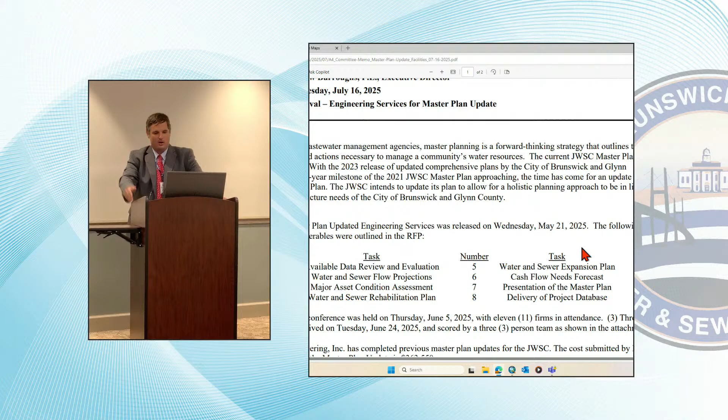Typically we update our master plan every 5 years. It's good for us to have a master plan so we can look forward. We typically do 20-year master plans. Our last master plan was started in 2020 and completed in 2021. Then Glynn County and the city of Brunswick both updated their comprehensive plans in 2023, which include updated population projections, land use maps, and everything like that. So it works out well - basically we update our plan, and in the intermediate, they update theirs, so we're always using the most recent numbers. Given that it's been 5 years since we started the new master plan, we put out an RFP to update the master plan in May.

There are 8 tasks associated with this. First, available data review - we collect a tremendous amount of data, both through CityWorks and our new AMI meters, SCADA, and everything like that, plus development that we've had and have records on. We'll submit all that information as requested by the engineer to complete the plan update.

They will update flow projections, taking the population projections produced by the city and county and updating flow projections based off the service areas. This time, with the new AMI meters, we'll have a lot more specific flow measurements.

We will also be getting a major asset condition assessment, so they'll go through all 3 of the wastewater facilities, check out our well facilities, and then a selection of lift stations where their engineering team will physically do inspections.

From those three elements - the data we have, the projected flows, and the condition assessments - they will generate the rehab plan for the next 20 years. Now, the rehab plan isn't something we follow in a direct order; it's a guideline. We prioritize based on risk scores through asset management, based on the condition and the consequence of failure. So we get a list of what needs to be done in the next 5 years, though not necessarily in a specific order.

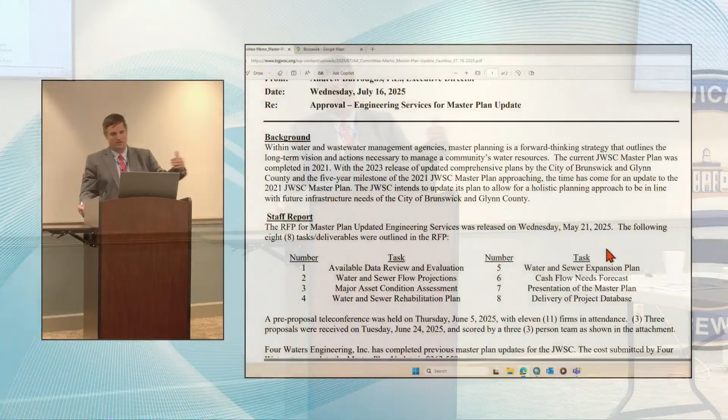We'll also take, based on those population projections and land use maps, a look at where we might need to expand our system to increase service areas. This can be with continued focus on infill development as we've been doing, or for areas where the county - not so much the city, since they don't have much undeveloped property - has designated potential residential areas that need to be serviced in the future.

Then, from the rehab and expansion plans, they will develop a cash flow needs forecast for us. We won't necessarily use this to project rates going forward, but it gives us an idea of where we need to be moving with our rates.

They will then come to the Facilities Committee and the full commission and present the master plan for your review and acceptance. Upon completion of that, they will generate a project database that will be delivered to staff. That is a tool we can use to go about updating the plan as we complete projects.

The unfortunate reality is updating the cost of those projects as they're currently in the plan to make sure they're updated moving forward so we have that cash flow where it needs to be based off of current pricing. The last master plan was begun right during COVID before everything went crazy with prices, so the prices you see in there are not reflective of the current environment. I would suspect this iteration of the master plan is going to indicate we need to spend more money than the last master plan just because the cost of construction has gone up so much since we updated it last time.

We did have 3 proposals submitted to us. All those proposals were scored by a 3-person team, shown in the attachment. The highest scoring team is Four Waters Engineering. Four Waters has completed the last 2 master plans that we have done, and members of their team worked for the firm that did the previous 2 master plans. So we've got members of their team that have been working on our master plans for over 20 years. The highest scoring, Four Waters, had an average score of 95 out of 100.

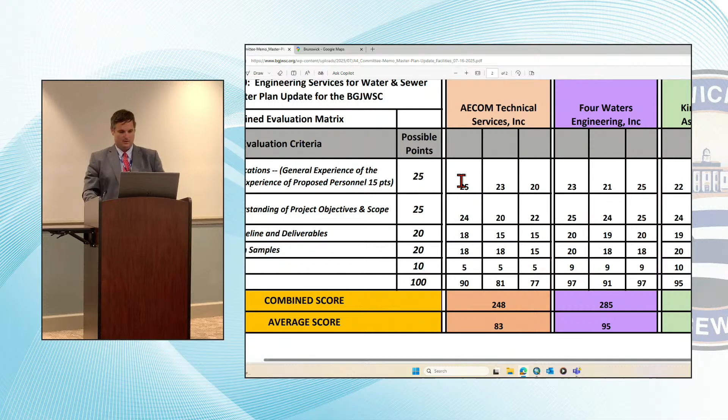And with that, I'll be happy to take any questions. This will be funded from uncommitted funds in the R&R reserve at this time.

Seems like a bunch of money. I understand, yes sir. The last one was $260,000, I believe, 5 years ago.

Can we take the last one and just do it ourselves? I don't know that we have enough staff availability to do that. I think we have the skills to do that, but I don't know that we have available time.

Everything on the 5-year plan? We haven't finished everything. We've addressed the majority of the 5-year plan, just maybe not in the ways that the master plan identified to address. Some of the projects have been funded but have not been completed yet, but a lot of the projects that we've started in the last 5 years or have funded in the last 5 years that we haven't gotten to yet were master plan related projects.

A lot of this is going to be based on population projections that the county and the city have done. That was in 2023, yes sir, that's when those plans were adopted. Will they be adopted and updated? That'll be 2028 for the city and the county for the next time. They do it every 5 years, and we kind of go right in the middle. We're mandated to do it.

What exactly are you hoping to gain by this? I think getting a third-party review of our major asset conditions is very helpful. For our purposes, the master plan is sort of a guidepost for what we need to do moving forward. Sometimes we deal with things — the things that keep you up at night are the ones that call you at 2 in the morning, and that might not actually be the most important thing we need to take care of right now.

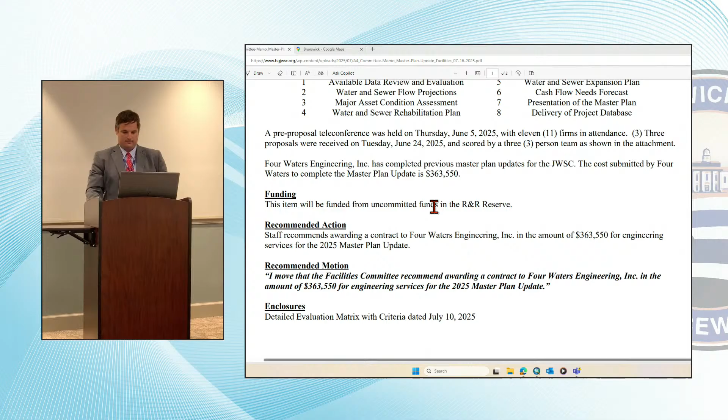What have we not done in the 5-year plan? Well, hang on, let me pull it up. Assuming I can get this to pull up.

Really shocked, Andrew, you don't have that at the tip of your tongue. I've slept once since then.

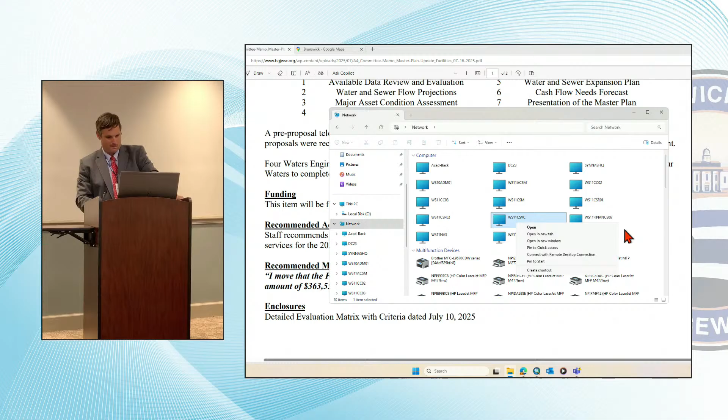DC23 shares is on here. How much do you actually expect this company to go out and inspect the assets? They do all 3 of our wastewater plants, all of our well facilities, and last time they inspected 25 pump stations. We'll get a different 25 inspected this time.

Is this the only way to do it? No, sir, it's not the only way. We do internal inspections, and our crews are out there, but to get a third-party inspection, this is the only mechanism we currently use.

Is grant or FEMA funding tied to a master plan? If you don't have it, you don't get it? Yes, sir, they want to see that the work you are utilizing is part of a plan you've got moving forward, and that's why they also request flood resiliency and things like that in the master plan process. I know with the county, that's one of the reasons we continue to do it, because a lot of funding is tied to it.

Well, I'm not gonna be able to pull the plan up unless they've got the updated one on the website, which I guess it should be. I can't get to the planning drive. This computer doesn't have access to the planning drive. It's on the website too. Yeah.

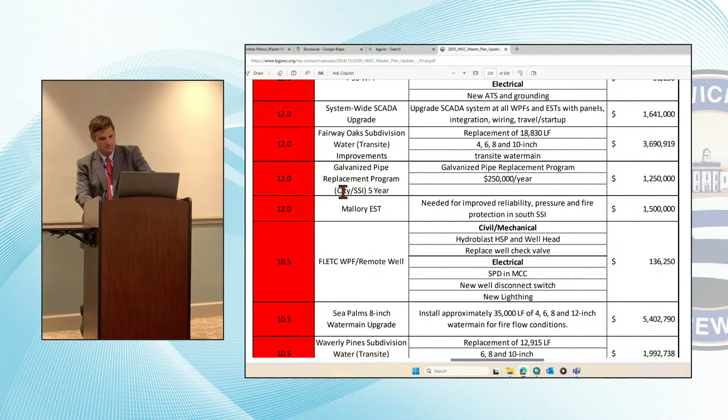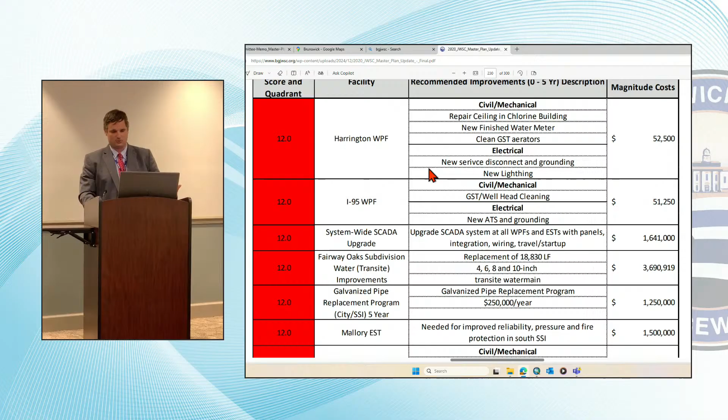Certainly, like them, so the water plan, we haven't gotten to it yet, but we've got funded projects to work on: the Harrington well, system-wide SCADA. We've started, obviously, we continue to work on the galvanized pipe updates. Like some of these neighborhood projects, Fairway Oaks, Sea Palms, Waverly Pines, we have not got to those yet. But on this page on the water side, the well work, a lot of that's either funded or has been completed. Let me find one here. The electrical systems we're got to replace, we got that project funded for, we haven't gotten started on the 5-year portion.

Let's see, that's the 2026 systems on some of the pump stations. On the pump stations, yes, sir, that's just the water side. Let me get down to the sewer side.

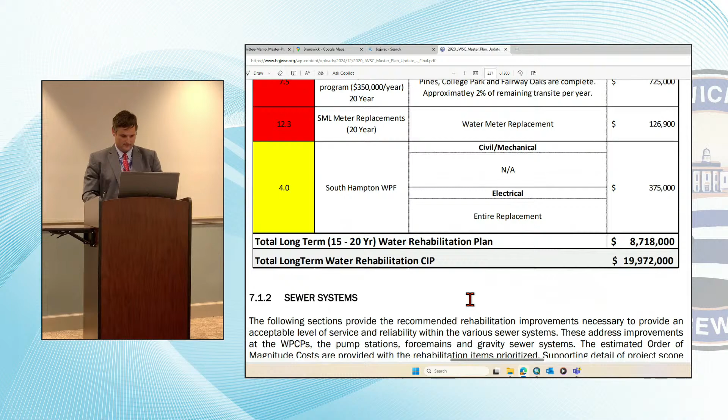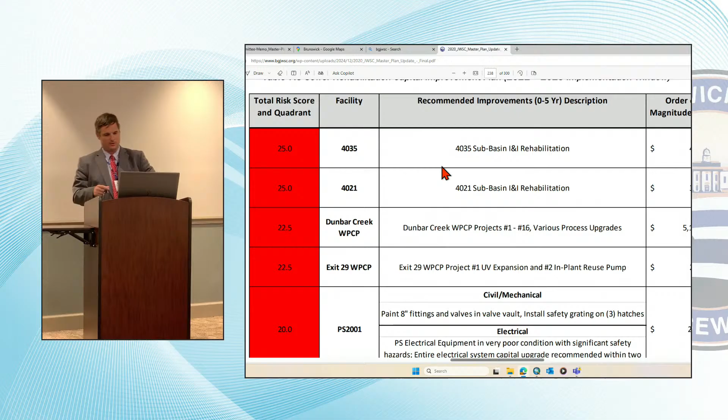So on the sewer side, they recommended I&I reduction projects. We lined in the 4035 basin, we lined in the 4021 basin. We've upgraded Dunbar. We haven't got to exit 29 yet. We've done 2001, 4002, 3101. We've done some rehab, we need to do some more rehab in the 2WTP basin. We've done 2002, we haven't done 2023 or 3129. We did 4001, and I don't know if we did everything on 3114.

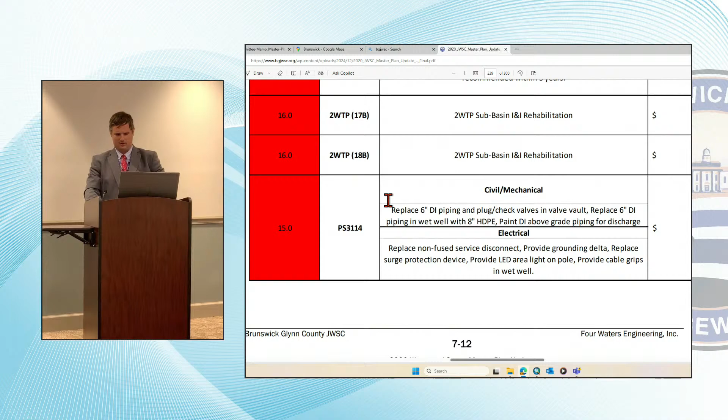So we've been going down the list, knocking a bunch of these off in the last 5 years. We've done a lot of work at 4017, 2032; 2003 we haven't done a substantial amount of work yet. So that's probably about what we have gotten to on that first 5-year list.

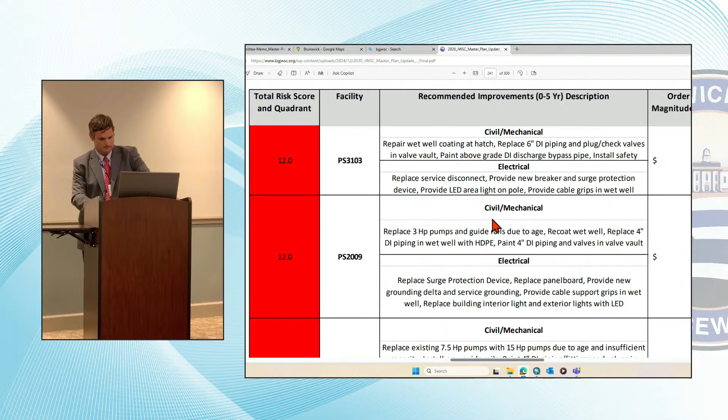Is it the fact that we had so many that we didn't have the deed easement? That has not necessarily slowed anything up on this, because we have been operating those pump stations for so long. Honestly, what has slowed keeping up with this 5-year plan more than anything is just the available funding.

Let's pull up one project I know the numbers on. Project 4002, their recommended rehab was $400,000, and it came in at 1.2 million. You've got a finite resource, you're not going to get to all of it in that regard.

My point being, as part of the master plan, shouldn't it be to clean up our paperwork? We can try to get them to assist with that. A lot of this predates even stormwater and sewer, but I do believe we need a focused effort on getting these things cleaned up.

We also did an expansion plan, and we've begun some work on it, the 500,000 gallon tank. We did a 750 building at Highway 99. Canal Road upgrades have been almost completed now.

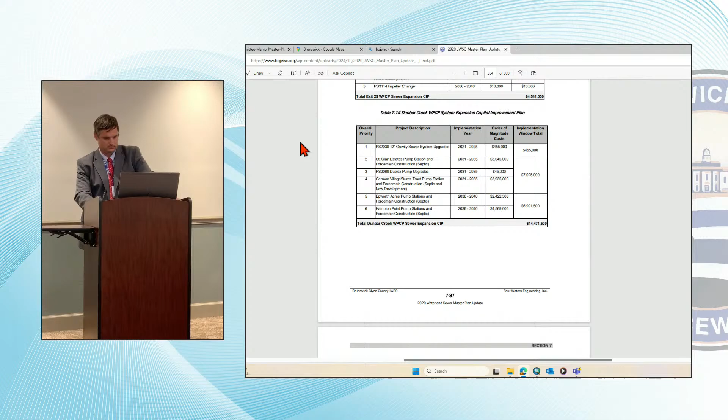How long are the prices good for? Ms. Pam, do you remember, was it 30 days or 60 days? Something like that, yes.

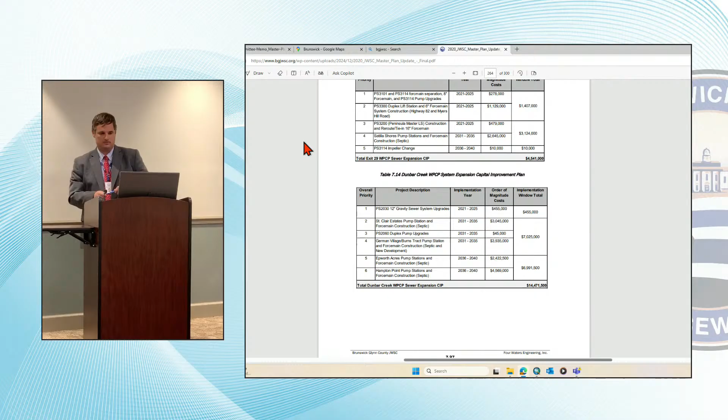Go back a couple steps. Part of my question is, you have a master plan in one hand, then you have a deficiency report in another hand. They don't go together. The deficiency reports are typically done by inspections, and that really should be done on a yearly basis to create work reports.

Are they taking some of your work requests and incorporating them into their master plan? Yeah, so we'll turn over all of the work orders we've done, and we'll get them access to CityWorks, and they can come in and look at all of the work.

We can pull that information on where we've been doing maintenance, and they may look at that and go, y'all have been having to unstop these pumps a lot, here's a solution for that, here's a project to solve that problem, things like that.

We do inspections of our assets. We visit our lift stations, every lift station's visited at least once a month, most of them more often than that. So we do generate work outside of the master plan, but most of our capital projects don't come from that.

They come more from either master plan work or capacity needs that have sprung up in the last 5 years. We talk about population projections just done 2 or 3 years ago, the population of Glynn County seems to be rapidly increasing every year these days.

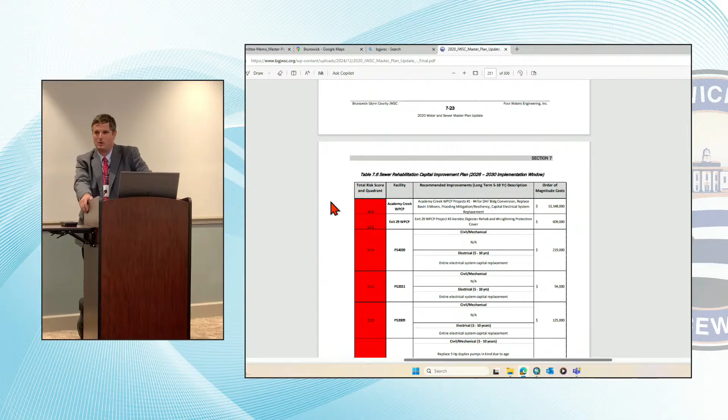And the board has not previously been in support of building out a sewer model. Because, I mean, you can calculate the capacity of a sewer line. It's a little bit different than a looped water system where people are pulling from multiple directions.

This involves updating the water model. It does not involve updating a sewer model, because that was one of the questions that was asked by the firms.

What is the turnaround time? Nine months. The goal would be, if this is awarded this month and they can get started in the next few weeks, that this would be completed by the end of May, early June next year.

So it would coincide with that being accepted by the board going into the new fiscal year. But not soon enough to include recommendations into the budget that you would need to. We'll have some preliminary numbers, but not final numbers, yes, sir.

Yes, part of what we'll do, and what we did last time with the facilities committee, we would have facilities committee workshops with the master planning team as portions of that. We would do that again to keep everybody up to date. We would typically, on the Wednesday of, not every month, but when we needed to do one, we'd schedule one at 10 o'clock or something like that.

A whole lot still to be done on that other plan. Well, probably ought to be given priority over spending money on updating the plan. Maybe do a plan in another two years or so.

That's certainly an option. We can continue just, if we're updating the plan every five years, there's always going to be projects left over that did not get done in the previous five-year period. And so a lot of it would be the same. Obviously, conditions have changed from both flow, population, and just the condition of the assets in the last five years. It might change the priorities in some order, but a lot of the projects are going to be very similar.

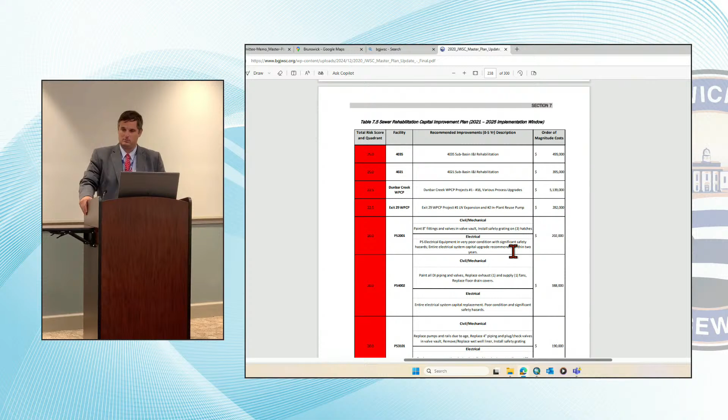Now, are they going to find any I&I issues? They will, from an I&I perspective, we do it in-house as well, but they'll take all that data and compile projected flows versus what we're seeing to determine where they've identified, not this segment, but this basin - we need to do additional work in this basin for I&I issues.

They won't necessarily be able to tell us immediately whether it's rainfall or groundwater, but they can give us some suggestions in that regard.

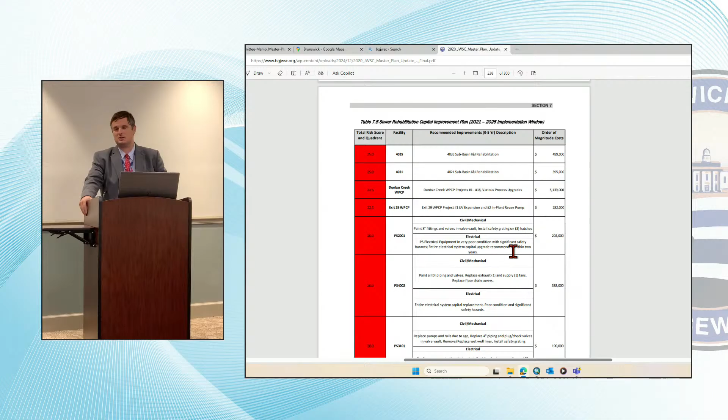So if it's due to the cable being put in, it should be countywide. That's the same problem we have, yes. It's not just showing up more in Dunbar. Well, not necessarily - it hasn't shown up more at Dunbar, it's just that going from 3 to 7 shows up quicker at Dunbar than going from 8 to 12 at Academy.

How do we find those problems? Typically we'll either get a blockage because it'll rag up, or we'll start having sinkholes. Other than that, we can be proactive. What we do is we inspect the lines, we jet lines, and then we'll find a blockage when we jet the line, or we think it's a blockage and it's actually a fiber connection that has gone through our line, or when we put the camera in the line.

The goal is to camera the system once every 10 years, so you're not going to get through that in a year. And so we jet the system every 5 years. We continue to find these issues, but not with just one fiber contractor - we found 8 to 10-year-old fiber strikes.

There was one right at Altama and Cypress Mill Road, right at that major intersection, that was at least 10 years old when we cameraed and found it. A lot of the laterals get hit, and that's where we find a lot of the customers start backing up because their laterals got struck. We found a lot of those thus far.

We found the 8-inch main in the 4017 basin. The master plan they're going to do is just going to tell us that - that's all they're going to say. I don't think that's all they'll tell us, but that would probably be near the top of the list. We just got to do the work to find it.

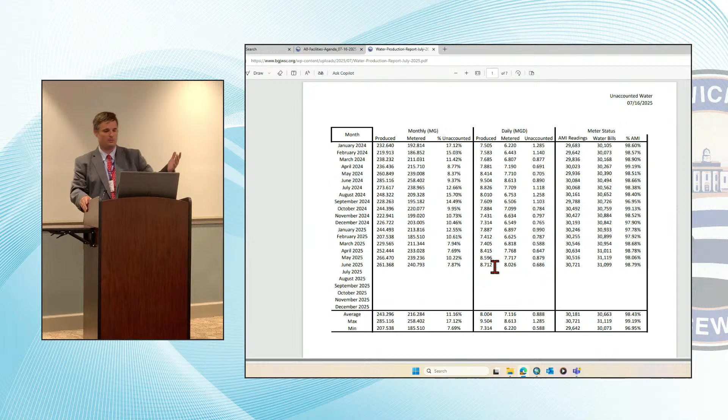Neptune's been very helpful, and we've been very helpful to Neptune, I believe, with feedback, and they're providing opportunities for us to test things, so it's been a good partnership for us. Hopefully, if this works, we can eliminate some of the meters we're still having to go out and do the AMR reading on with these higher gain antennas.

Right now, when you take a reading, you just drive by - we click a button, and 98.79% of them come in that way. The rest of them, we have to go drive by, because our current AMI meters do have AMR fallback. AMI is done digitally, AMR is done through radio reads with the truck.

Then, of course, there's always a handful that won't pick up either one of them, and you have to lift the lid. Typically, what we find when that happens is someone has put something metal over the top of the box, and it's not transmitting the signal because you have a large metal structure over the top of it.

Heard at the conference this week that in one of the storms, people were putting their storm debris on top of their meter boxes so they couldn't get a meter reading, which I thought was a creative way to avoid paying your water bill for the month. We'll catch up next month. Apparently they called up next month and got mad because their bill doubled. Well, it didn't double, you just didn't pay last month.

Andrew, why is the Howard Coffin well not running yet? Howard Coffin well is running, it just was not running by June 30th. The motor was ready, but according to EPD standards, you cannot leave a well running that is not secured, and we've been waiting on fencing to be installed. We could have run it if we were sitting there the entire time, but we put up temporary fencing. I haven't been by this week, I don't know if the permanent fencing's up, but the temporary fencing is installed and it is running now.

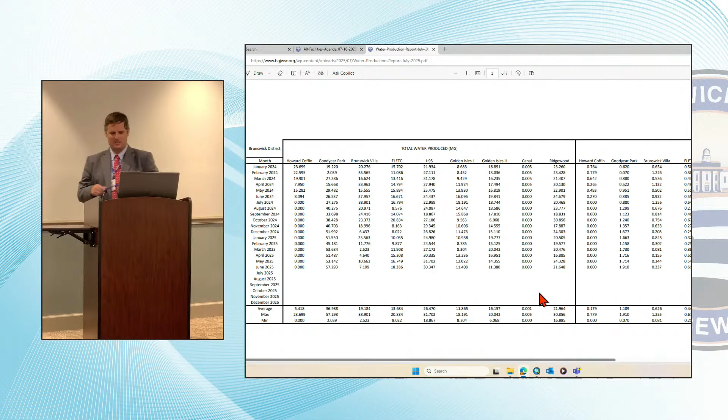Are we still going to use the Miocene wells? We're still going to use them. Canal Road is very near being completed, which Mr. Klein will go over in the project report, and that will allow us to potentially dial back Golden Isles 1 and 2 with Canal Road online, but they'll still be connected to the system and ran daily, just maybe not as much. Same way with Brunswick Villa - it runs daily, we just don't want to run it nonstop.

But on our graph, you'll see very little fluctuation, but in general that trend stays pretty consistent month to month on the mainland.

St. Simons for the month, as you would expect and is always the case, most of the usage is on the south end, but all 4 wells producing at least 17 million gallons for the month for a total flow of 3.1 million gallons a day. Makes sense, June, heavy tourism month.

So 3.1 million gallons for St. Simons. And typically, particularly in the summertime when we get taste and odor complaints on St. Simons for the month, it's because somebody has got either a rental property or a second home, and they have not drained the hot water heater in the last 3 months, and they get odors in their hot water.

So if you have odor, if you're smelling sulfur in the water, particularly if you're in the shower, our immediate suggestion to you is please go drain your hot water heater, let it fill back up, and see if it goes away.

Can you explain why that happens? As it heats up, the sulfur comes out of the water more, goes into the gaseous phase, and also, particularly because it's been sitting there for a while, a lot of that sediment stays in and settles out and doesn't get a chance to move through the system.

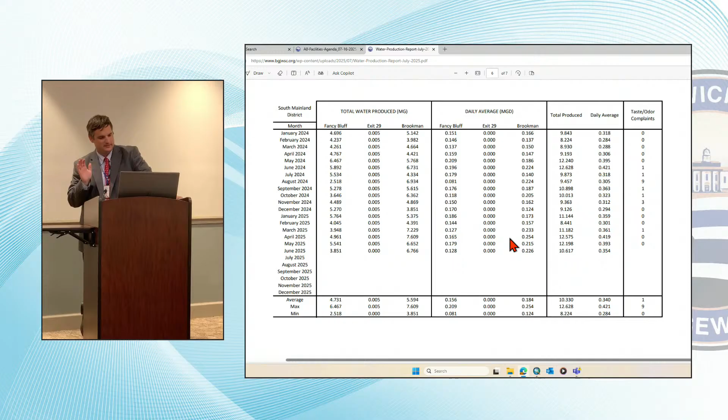South Mainland, Fancy Bluff and Old Brookman. Fancy Bluff, not as much flow as we typically would have there for the month. Brookman still ticking right along though, 354,000 gallons a day. That should be a 0 on taste and odor complaints there - I apparently missed typing that number in there. But again, pretty consistent flow month to month, slight variations, but pretty consistent flow down at exit 29.

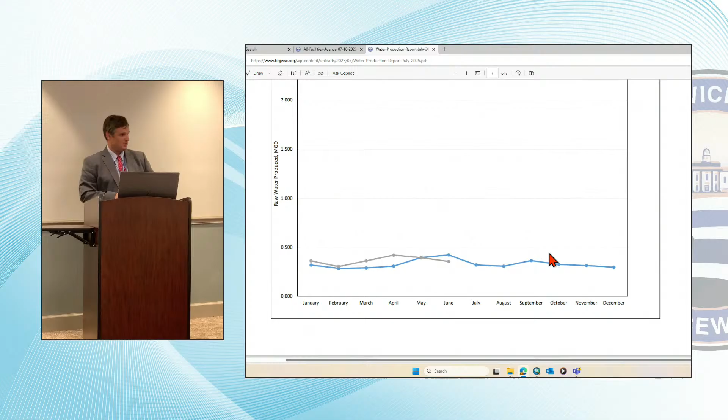In that area, if you've been out there, we are seeing some more growth, so we expect those numbers to tick up. Particularly, we've got a new apartment complex that should be coming online in the next month or two. With the flows that they see at apartment complexes, that will be a noticeable increase on the daily flow rate out there at Clement Bell Farms, and then the townhomes at Southport Parkway, as they get more and more occupied, those numbers should start coming up.

Any questions on the water report?

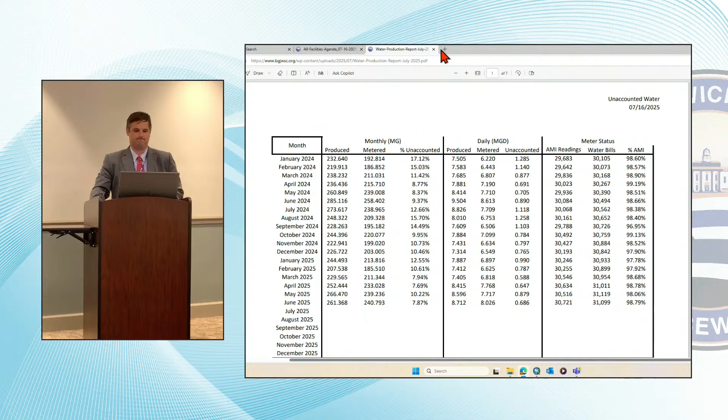Wastewater report. Academy Creek for the month, 7.1 million gallons a day at Academy Creek for the month.

And if you look at the influent concentrations, one thing to jump off the page is a drastic reduction in the influent TSS. That is because as the project has continued forward, we are no longer having to augment the RAS concentration by opening the drains on the clarifiers back to the head of the plant.

So that is an actual true influent number - typically would be higher than that. We did have some rainfall for the month that diluted that a little bit, but those previous months at 1,000 and 1,500, those are not true representations. That's because we were recycling RAS through the influent by opening the drains back to the head of the plant.

But other than the ongoing process of getting the ammonia back down, everything at the Academy for the month was within limits - 93% BOD removal. That is not due to not removing BOD, but because we only had 87 parts coming in for the month due to the I&I coming into the facility. 95% TSS, again, not necessarily due to high TSS leaving the facility, but just that lower influent concentration.

We do have one of the filters back online. The filters had been bypassed for the previous 2 months to install a new 48-inch line as a portion of the project. One of the filters is back online now, so the TSS number should be even lower next month with that filter back online. We're still waiting on work to be accomplished by the manufacturer on the second filter.

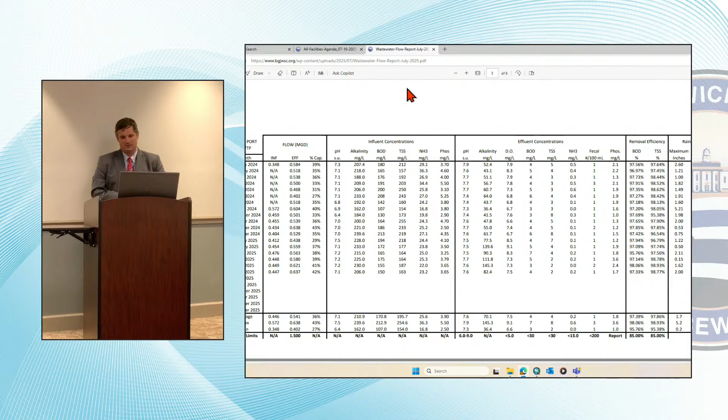And Southport, 600,000 gallons a day on the effluent reading. Staff is looking to identify why the gap in the influent and effluent numbers is widening. That should not be happening, so they're addressing that. I suspect what has happened, what we found out previously, there is a portion of the grit system, wash water that goes through the grit system that is pulled off before the influent meter and is put back in after the influent meter, and I suspect that's what's causing the problem. Again, we got to confirm whether that bypass has been opened back up again.

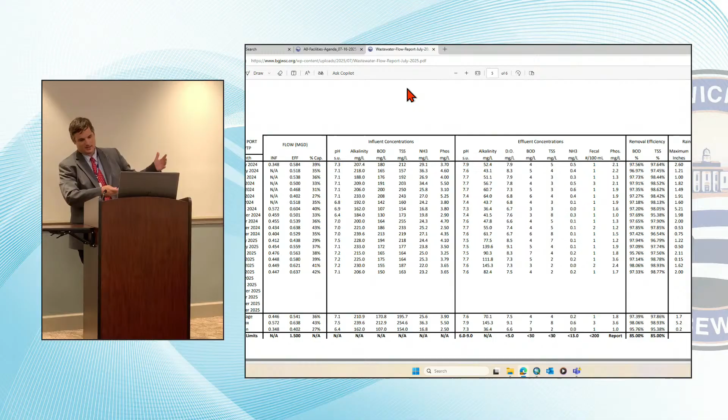But the plant doing very well down at exit 29, 97% BOD, almost 99% TSS removal for the month. And again, like I said, 6.5 inches of rain at exit 29, 5.6 inches of rain on Dunbar. I don't think it was only 3 inches of rain at Academy, given those other numbers being in very close proximity to one another.

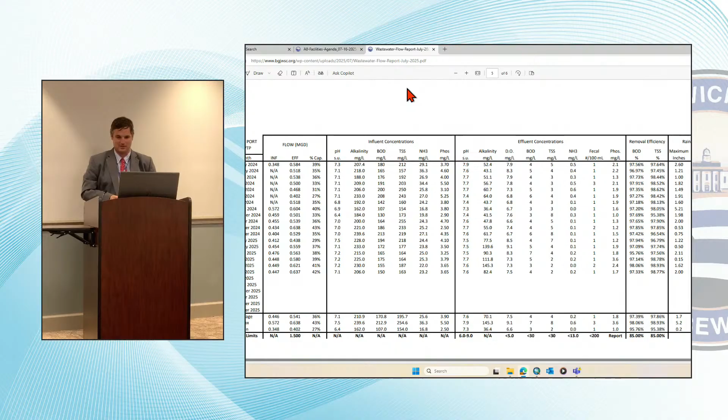So moving along there now, and we did address a long-standing generator issue at exit 29. So staff took care of an issue down there, so got that taken care of. So check that one off the list that we have been dealing with for several months now. It helps if you hook them up in the right order.

All our generators hooked up now? No. At Academy, the new generators, one of the new generators is hooked up, but not permanently hooked up. It's temporarily hooked up to, because the other one was not. We're going through some submittal review on that project. They have not begun construction.

What about all the others? Did we get a bunch of generators? We got 8 generators. We got 3 at Academy and 5 at well sites. They're all part of the same construction contract. They have not begun construction of any of those assets yet. We're just doing some submittal review at this point.

What did that contract? The POPCO, yes, sir. We got a meeting next week, tomorrow, Friday? Yeah, I don't know what day of the week it is. So yes, within the next few days, we have a meeting with them.

Yeah, whenever it shows up on my calendar, we'll meet with them.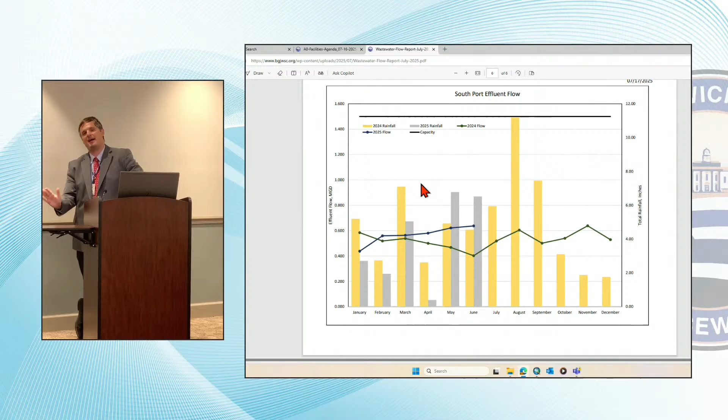How long is the construction period for that? It was 9, 10 months, 270 days. We have not issued a notice to proceed because they're checking on lead times. There's one panel for the large generator at Academy Creek, and they're trying to determine the lead time on that panel. So it may be a situation where we want them to start at Academy Creek, but due to the lead time on that panel, they may start at the well sites instead. They won't be finished until after hurricane season, they will absolutely not be finished until after hurricane season. I just hope they're finished before hurricane season next year.

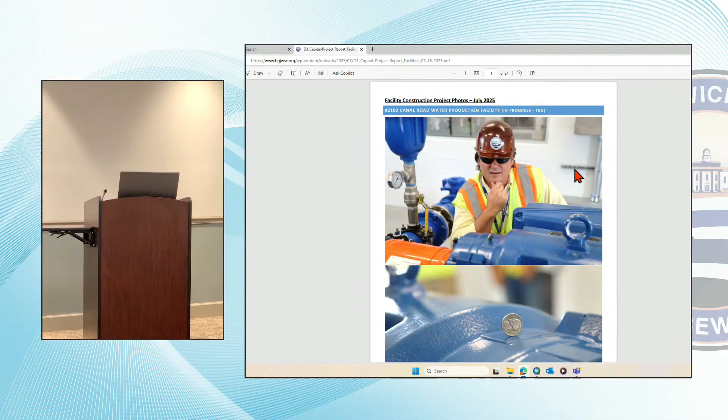You ready for the pictures? If y'all are, we'll let Todd do some talking. All right, oh great, we had a shot of Todd to start us off. Yeah, my apologies for the quality of the first picture in particular. Good afternoon, Commissioners. He's inspecting, Jason's too fast with his camera. Yeah, using the force, telekinesis. Maybe that was what was holding the nickel up. It could have been. So yeah, Todd was doing old school inspection methods for vibration testing.

So just for the Commissioners, y'all may already know this, forgive me if you do. When you have a separate motor that drives your pump, the motor puts the power to the pump, that's what moves the water. You've got two big shafts that go together, and it's very important to have those shafts lined up. The pump techs are there to do that with shimming and this and that, to have it as lined up as possible, you're never gonna be perfect. They have indicators that they use to do this. This is the old school test: you lay a nickel on the edge on top of the motor and check for vibration, and this one passed the nickel test.

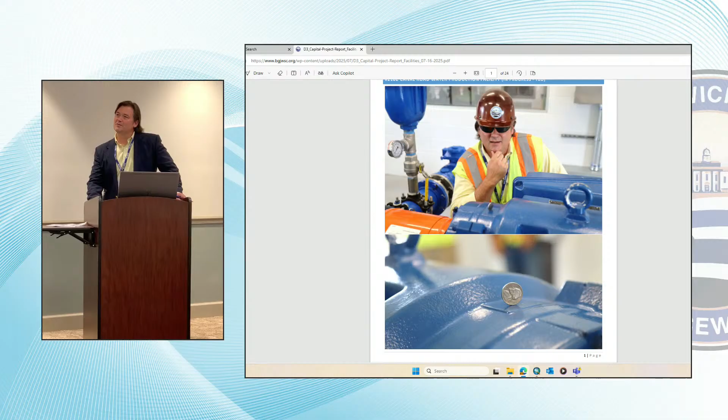Well, I've seen some pretty rough ones where you could see it bounce. If you lay it flat, it'll always pass. Yeah, you know. Anyway, that's another shot.

This was during, I'll say, a manufacturer startup of numerous components of the production facility there. Nice, good shot of the inside. I like the lighter color, machine gray myself, I think that looks real good. Makes a bright appearance inside for the operators.

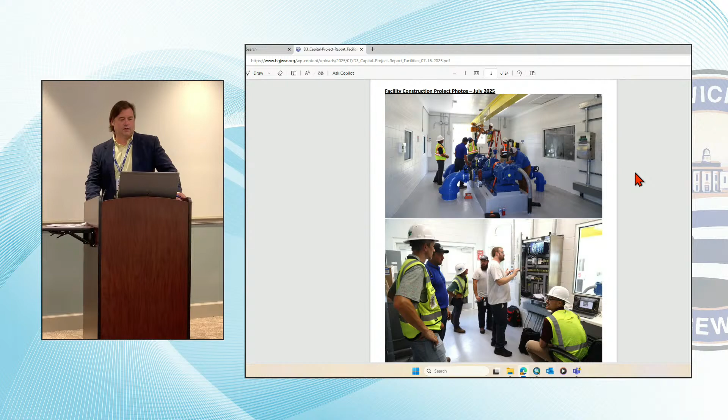That's the pump techs in the background doing their thing, laughing at me with my nickel. Next picture below shows a lot of electricians, with Mr. Grantham working with them, walking through the control side of things. You can see that is actually an independent building if you look back behind, segregated with air conditioning to keep those electronic components nice and cool.

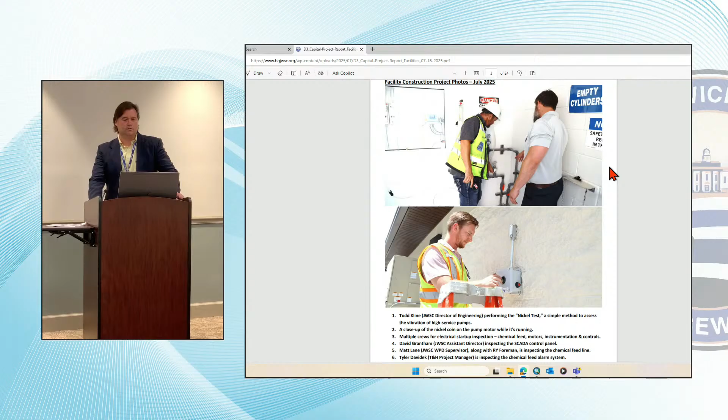There's Mr. Matt there working with one of our young superintendents, looking at chlorine. We were just speaking about the chlorine system, we're going to have a few bugs there, one of the last remaining items. There's Mr. Tyler in the bottom picture, he's from Thomas & Hutton, he's our assigned project manager, doing a couple checks there as well.

So there's really just one thing holding up starting that up right now. The last component is working out the final bugs, I believe some solenoid type issues with the chlorine injection system. Of course, for obvious reasons, that's got to be running correctly so that we don't under or over chlorinate the water that's sent to the system. So that's being worked out, should be very close.

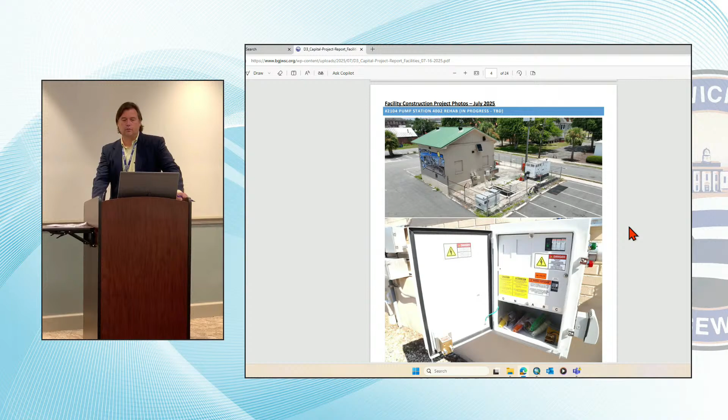Pump station 4002, which is one of the three, there is our generator docking station installed. Hasn't been tested yet. No, the generator docking station has been the last remaining thing for a couple of months on that, there was a delay getting those shipped from the manufacturer.

The purpose of the docking station is to make it as uniform and as easy as possible for the operators to hook up a generator when needed. At the stations that have the docking stations, we pull the generator up and it's hooked up in less than 10 minutes, just back it in there, pull the cables out, and it's hooked up. The ones we have to actually go in and hardwire into the top of the breakers take more like 45 minutes to an hour to get done.

So these stations cut the time to get a station on generator by at least a quarter of the amount of time, sometimes more, depending on how difficult it is to get tied into the breakers. Usually not perfect working conditions when trying to get a generator rigged up, so having that open panel is not good. Why do we have any hardwire?

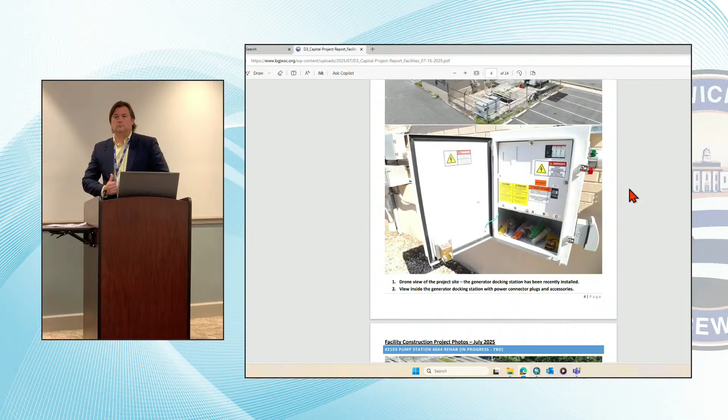There was not a generator docking station installed on a pump station or wastewater facility in Glynn County until 2 years ago. All of them were hardwired in. They have tie breakers where you have a main and a secondary, where you slide the bar at the top to lock it out, and you have to bring the 3 leads into the top of the panel. That was the standard install for all of our pump stations, and if you go out to about 130 of our pump stations, that's what they've still got.

So we have to bring little pigtail connectors because the generator cables won't actually go into the top, so you have to put Polaris lugs on and bring the smaller cables into the top. I'm surprised nobody's gotten shocked. We don't let but just a handful of people do that.

All right, next project is pump station 4044. Looking really good out there. Last little bit of grass to put in place. The road cut for our horizontal discharge to the receiving manhole and the connector out there is done.

Glynn County's right-of-way permit coordinator has signed off on the installation. They are happy with that paving job. Of course, it's under warranty, so we're going to keep an eye on it, as with all paving repairs, as traffic beats on it, to make sure it stays in good shape. That's a 12-month warranty. Another good shot there, a high-level view of the station itself down in there. You hardly notice it if you don't drive by anymore.

All the projects necessitated us putting that in, so they come to fruition, things happening out there. That station, we had to update it because... Yes, sir. Oh, yes, sir. Yes, sir. I'm sorry, 100%. Yeah, I did. Yeah, absolutely. So this station, if you zoom in on this picture here a little bit.

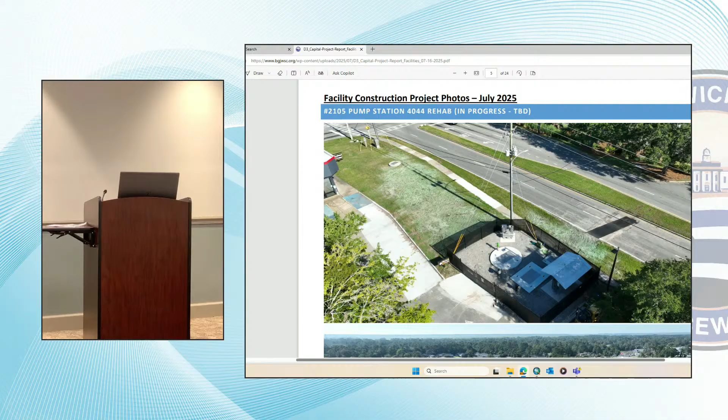So we're in really good shape there. As growth continues, who knows, maybe if we do a master plan, we'll certainly take a look at this station, at what else is going to come to it. What will be the next upgrade? Probably going to be a receiving gravity upgrade coming down as the flow increases. I believe it's a 12-inch receiving gravity.

We have that dialed back. It's sized for future growth, that station is, but we have it dialed back so it doesn't surcharge that receiving gravity. It's a very short force main, and that goes gravity all the way to 4021 in front of the old Sonic. I think it gets to be a 24-inch out there on Altama. Right now, Altama is where it transitions and upsizes to 24-inch. So we'll evaluate that, and determine the best route when we do the gravity upgrade at that point.

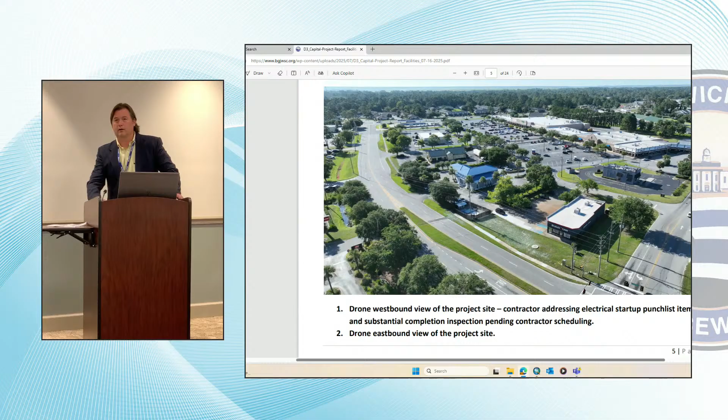But that's very near completion. Like I said, one of the two pump skids has been delivered and is on site. We're waiting on the other one to show up.

That's for phosphorus removal, right? Yes, sir. So we'll have 3 dosing points for alum. Most likely, we will be utilizing the one going into the aeration basin before the influent, before the aeration basin, so we get adequate mixing with that alum. But we can also go to the clarifiers or post clarifiers before the filter. So we'll have 3 dosing points to determine which one is most effective.

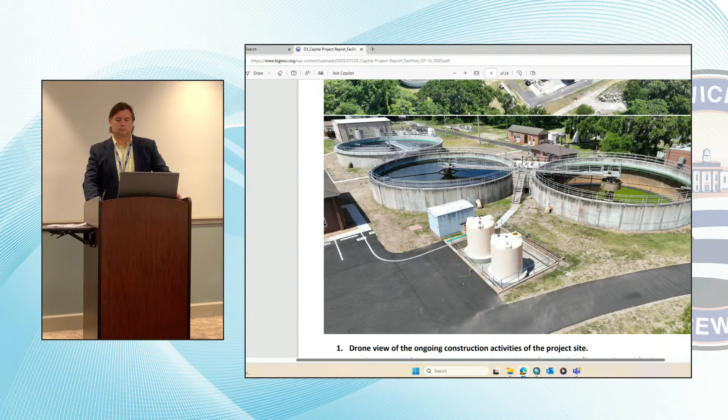And that one's clarifiers down. We need to do some maintenance on that clarifier. So we put the new one online, took that one down. We need to do some work. We've got some holes in the launders we need to patch up, things like that. Previously with only 2 clarifiers, it was very difficult to do maintenance on those clarifiers. So having a third one during normal flow conditions gives us an opportunity to get in there and do the maintenance we need to do. So as soon as that one's fixed, we're going to take the one in the middle off and fix items on that one.

And all of this is set so we can go up to 5 MGD from 4 MGD. Yes, sir.

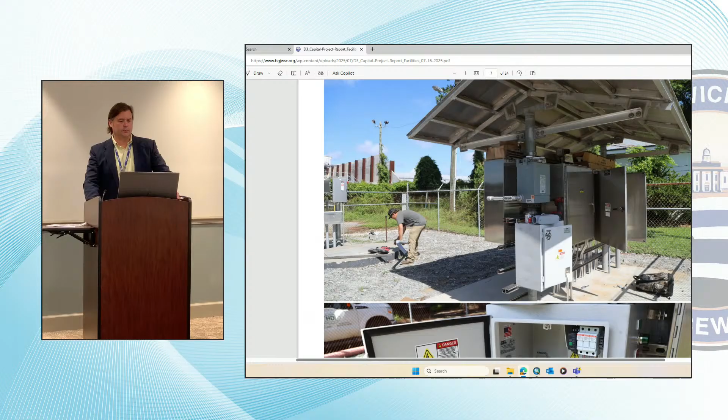Next project to look at is Pump Station 4001, again, one of the 3 pump station electrical upgrades going on. This is down on the south end of town, close to the port entrance, and it's just a shot of the new electrical panel shed.

Generator docking station again. You can see inside the station here with these. Again, trying to standardize those generator connections.

All right, one we're very proud of here. This is the completed station.

No chuckles. Which one, no, is the chuckles? Aftershock? That one or the one I'm seeing below? Man, yeah, I was just counting on my laugh count. Yeah, just not getting there.

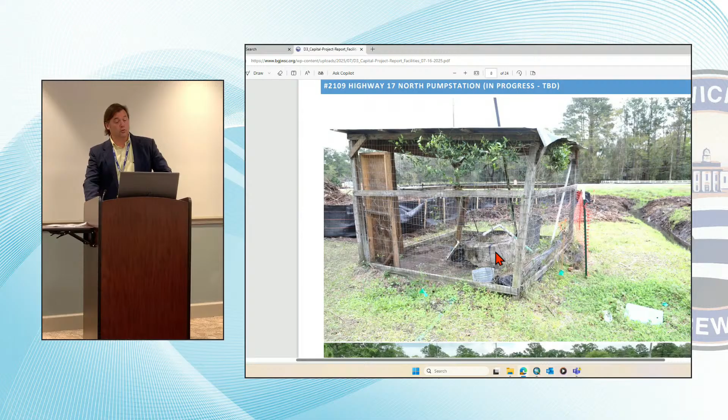Yeah, so this is affectionately called the chicken coop. It is there no more. This was a private pump station. We were not operating this pump station. Not operating the station, so this was only serving at the time Golden Shores Mobile Home Park, and this is what it looks like today.

So as part of working with the property owner, we obtained a 50 by 50 pump station site. Now we have a nice, we'll call it regional station there that can accept flow, not only from the immediate basin there at Golden Shores Mobile Home Park, but also adjacent and across Highway 17 when the time comes for that. We set elevations to allow us to extend gravity if necessary.

This station was designed in-house, yes. Second one, we did 4116. Yeah, we've done, for design build sets, yes, second. No, 4116 by the Public Safety Complex that Southern Civil did. We did the in-house design on that as well. Design, construction management as well, also, so that was in an effort to use our internal talents for that.

Pretty good looking station. I think some key things to point out here that maybe we did a little differently this go around. We're always looking for better mouse traps. Here, it's above ground piping. Not everybody's a fan of above ground piping. I myself am, because it's easy for operators to get to and work on, keep an eye on. When it's down in a vault, it's forgotten about, never maintained, to be honest.

So this is also, it's high density polyethylene, it's polypipe, so it's plastic. We check with manufacturers to make sure there's no issues with UV radiation and that kind of thing. Being exposed to sunlight, of course, would come to mind. No problem on that end as far as manufacturers tell us. Check to see how it goes. We're trying to use plastic and PVC wherever possible in our sewer collection system, so we don't have to come back and replace this stuff. It's just our collection system is very harsh on carbon steels and iron.

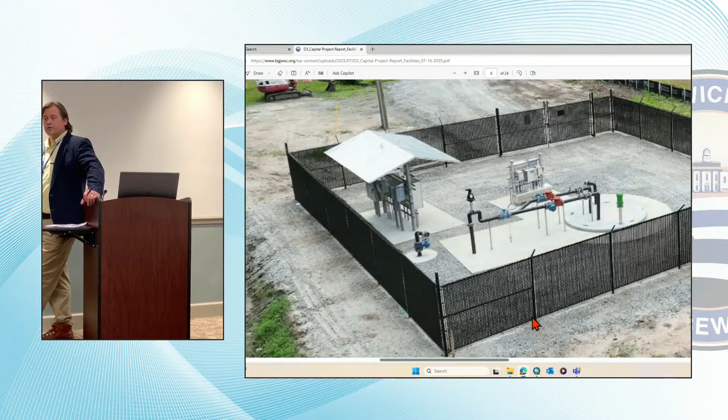So anything else to point out here? Here's a new carbon filter that actually our contractor showcased to us on the 44 project. We like the way that works, so we tried it there too. And the concrete work, it's a new kind of style, but we put a lot of concrete out there. Again, trying to think of the operators. They're out there working in the middle of a hurricane, keeping their feet dry. Well, as dry as possible. Not standing in standing water is the intent.

Making sure there's not tripping hazards, since they're gonna be working from the stations, control panel, back and forth to the wet wells, all this and that. So we have nice transition periods, easily accessible bypass connections, open wide entrance gates, and a lot of things we really try. We get a lot of feedback from the operations folks - they're our clients internally.

Filters for odor, yes, carbon filters - just change out the carbon. They've changed them out about every 3 months, but it depends on what's at the station. Sometimes it's a little quicker, sometimes a little slower. We put some of those at manholes in our system too, not that exact style - we've used the hang-them-in-bags carbon disc style. They work out reasonably well. If there's extremely high H2S concentrations, they dissolve very quickly, but if it's not too bad, they seem to work a little better on the pump stations than they do with the manholes.

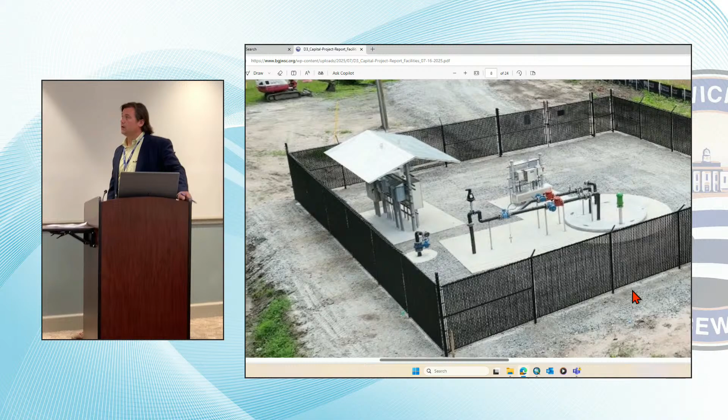How does the plastic do with the sun? Great question. Our manufacturers think of that too - what's the effect of the sunlight, the UV radiation? We used to have a lot of issues. They actually add additives now into the plastic itself. We've seen the manufacturers extrude it and everything, a lot of research on that. It's a test, we're gonna see how it goes, but we're told it shouldn't have any effects.

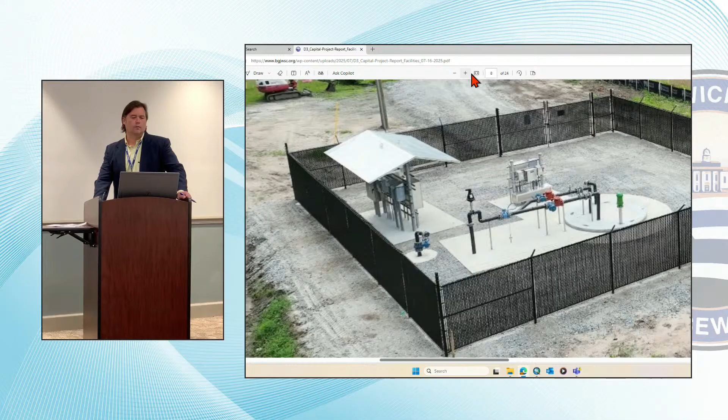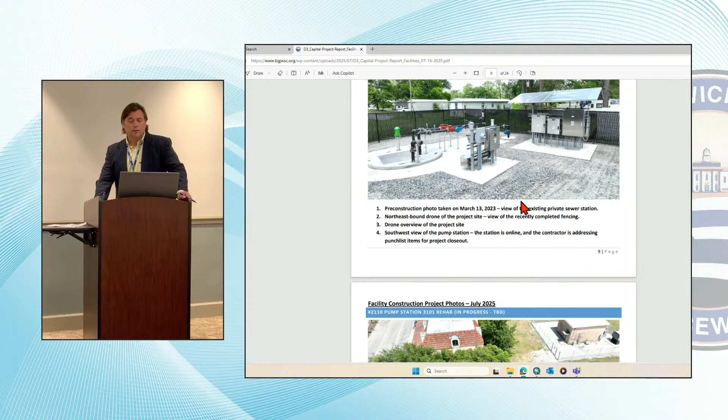All right, pretty proud of this one here. Another shot overview of that - you can see the new Highway 17 alignment, the new widening roadway going in right there, and there's our station right next to it. Another good shot looking on the inside. Our contractor did a fine job on this. The station's been online for 3 or 4 weeks, and to my knowledge, hadn't had a minute's worth of trouble out of it.

When's Highway 17 gonna be done? That is a GDOT project, sir, you'll have to ask them. Todd, I would not venture to guess - sometime this century, I imagine.

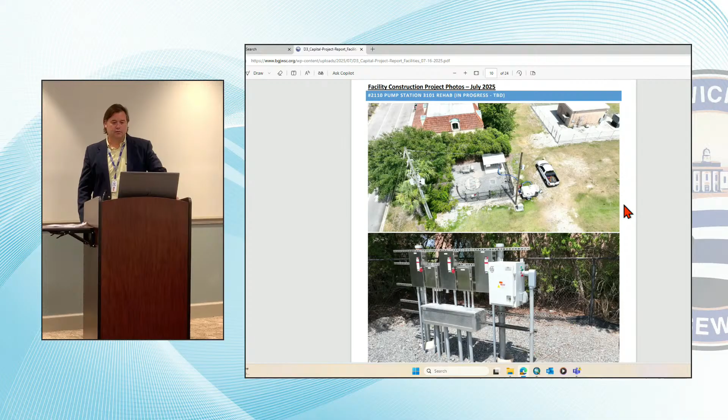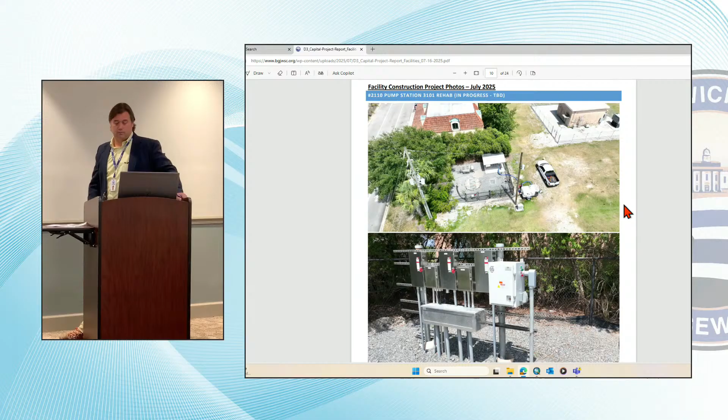And it's a hazard for our vacuum con crews going in and out, raising the snorkel and all that, getting around - last thing they want to do is snag into that thing. So that has now been moved and is being buried by Comcast outside of our station. One of the little details we made sure happened with this improvement.

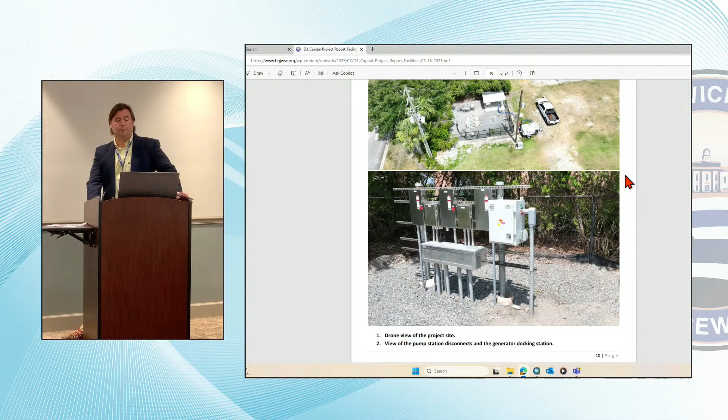Again, it's mostly electrical, hardly anything to do with the structure or piping or the pumps - that's being handled in-house. We sent the pumps for rehab and got them back, and they were wired incorrectly, so we sent them back to get them rewired again, obviously at their cost. As soon as we get those pumps back, we'll do a startup on this station and get this one closed out - that's the third of the three.

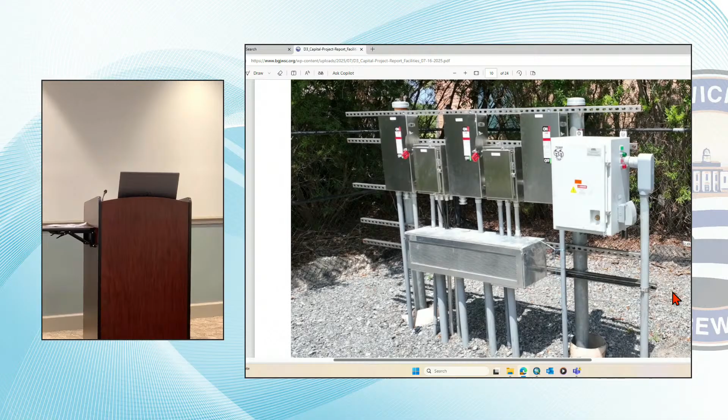Another little innovation since we're right here to showcase. One of the biggest issues you deal with for corrosion is the hydrogen sulfide gas - it's a byproduct of what happens in the wastewater system. These conduits feed the cables that go to the pumps, controllers, and floats down in the wet wells - that's where all the gas is formed, and that gas is going to find its way out. A lot of times it'll find its way out through a conduit if the cable glands fail, and if it's just a straight pipe connection, you're direct injecting that contaminated gas right here. So we've designed this with operations input in-house, and it's actually been copied by other people who like this idea.

It's actually an air gap that's in there. So the conduits coming in here are open to the atmosphere, so any gas that does make it up gets to find its way out, and then these are cable glanded or protected from the gas.

I've been told, not confirmed, but I've been told the JEA has started installing that on their pump stations. Typically we rob ideas from them, but they stole this one from us. Yeah, what do they say about mimicry?

I'll take that. Right, Academy Creek, Academy Creek there.

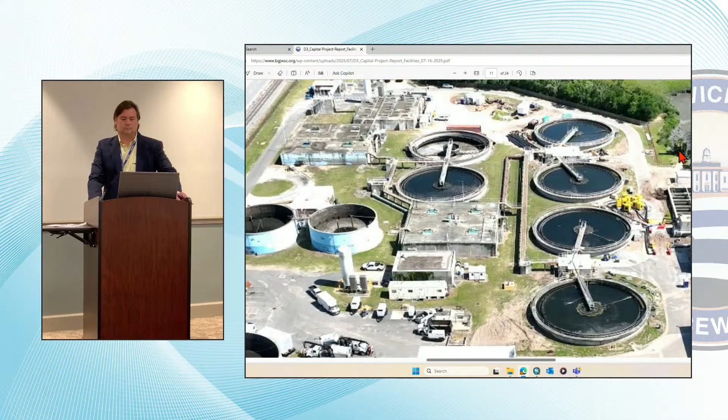Well, that is not there anymore. That bypass is no longer there. It's been moved down to the effluent side, so they could install a secondary effluent line. As tends to be the case, a lot of activity happens in the last 4 to 6 weeks of a project. Seems like you get more work done in the last 4 to 6 weeks than in the 6 months before. So they've got a rhythm now, they're moving along, and it will help us out at the plant.

Doing the RAS project, as we've staged through that over the last 3 to 4 months, we've had to bring clarifiers down, bring them back up, move them around. A wastewater plant is a giant digestive system, so the more consistent you can keep it, the better it is. When you start turning things on and off, it causes some problems restabilizing. Hopefully after Tuesday it will be back to the point where it's stabilized for a while on the biology there.

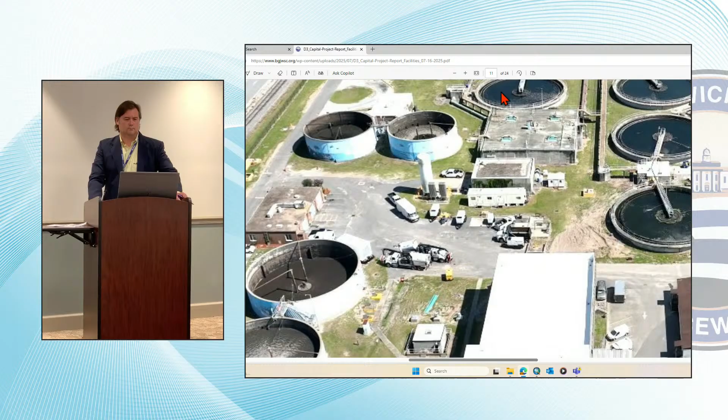All right, well Todd, let me just come up there. Yep.

All right, so Todd pointed out the bypass pump setup here. There are 5 bypass pumps sitting in this overview. Those have been relocated, but that manhole they were bypassing out of, to get 5 suction lines in there, they took the barrel section off the manhole. In the high flow situation, the contact chamber here, we've got this side off in order to put in the UV equipment. There is one 6-foot weir at the end of that, which started to cause head loss and backed up through the facility.

With that barrel section off, it's a few feet lower than normal, so it bypassed all of the clarifiers before disinfection. They're supposed to restack this manhole by the end of the week, and hopefully within 3 to 4 weeks have the UV system online. When we get the UV system online, we'll have additional weir length, which will reduce the head loss leaving the facility, so at high flows it will not back up. Under normal conditions, if both sides had been on, this would not have happened, but the head loss over one 6-foot weir was substantial.

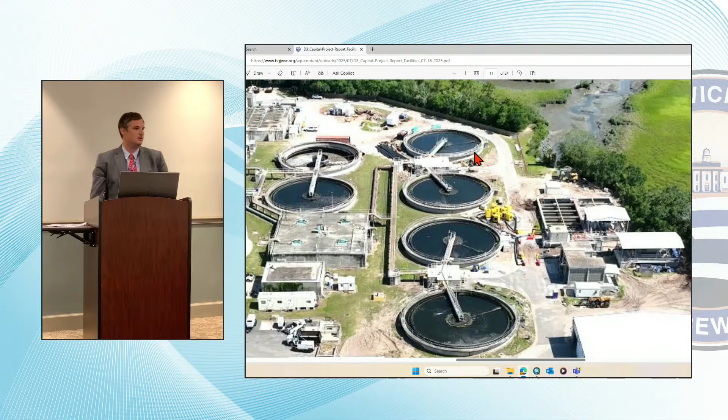You can see if you go back in old photos that our clarifiers on top are clearing up substantially more than they used to. There used to be a lot more solids. Those solids are typically either scum, grease and things that get in the system which are hard to get rid of, or dead sludge floating up when we're holding too many solids on the plant. That all gets skimmed off and pumped off, it doesn't go out. When you see these clearing up, we're getting better control over the solids on the plant. That's a visual indicator things are headed in the right direction.

We have space in these digesters, which is good to see. You can see where the normal water level is in this one. There's portions of the wall we're getting to inspect that we haven't got to inspect in a while.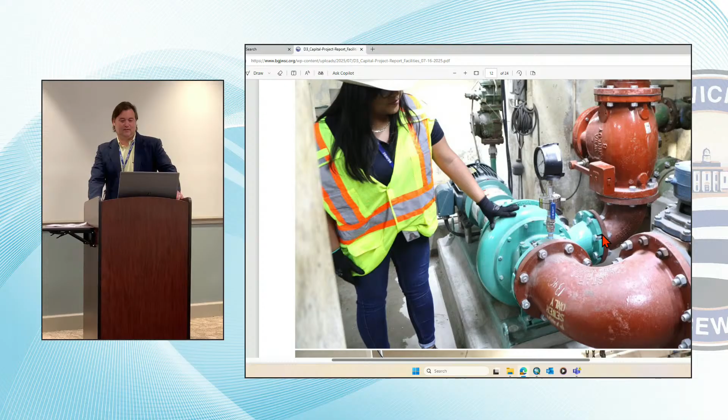Got it. Somebody was parked in my spot, so I had to move down today. I'm blaming them, wasn't me.

Yeah, it wasn't you. Those are the last two RAS pumps that have to be installed there, in RAS station number 1. You can see the grating to the right where that fan is at - that's how we have to lower those RAS pumps through there. They'll get an A-frame and lower it through. It's a touch and go situation trying to get it where it needs to go, but it is effective, and those new pumps are going to pay tremendous dividends.

We haven't been able to get the full benefit of the new pumps yet because they so out-pump the old RAS pumps that we've had to turn them back, because the old pumps deadhead pumping into a combined line and start slipping. So we haven't been able to ramp them up to where we'll eventually run them - they run at 1,800 RPM, but we've not been able to run them so far over about 1,200 RPM. During startup we'll run them up to 1,800 to confirm they run, but back them down so we don't deadhead the existing RAS pumps. We should start seeing even more benefits once those last old pumps are taken offline and the new pumps are started up next week.

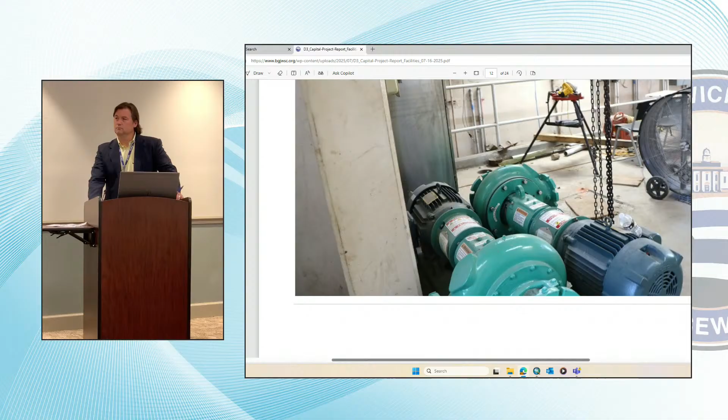While I was gone, Miss LaDonna witnessed a startup that went better than the two startups I was here to witness, so she's going to next week's startup, not me.

At the top there you can see all the old fittings and piping that came out of the RAS stations that they've pulled out. We'll be hauling that off to Glynn Iron and Steel, getting a little revenue back on the scrap sales.

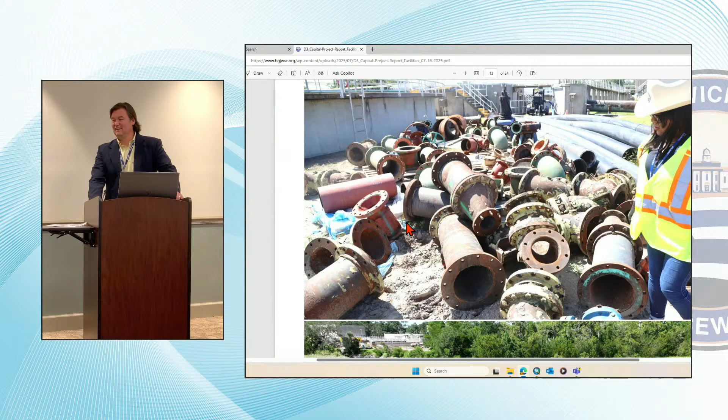It's funny - when you're selling, the price hasn't gone up, but when you're buying, it's went up near as much as what the buying cost has gone up.

Pretty shot there from our outfall too - you see the roseate spoonbill colony that's out there.

Brunswick Villa area sewer extensions - glad to report the paving, as far as the improvements go, the pipes and all that, is essentially done. The paving is about 50%, closing in on 50%.

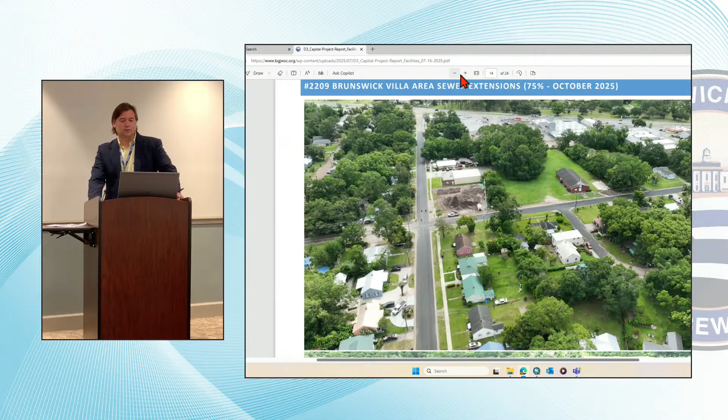Townsend and Habersham are back open, and side streets are left to pave out there now, as you can see. All the sewer lines are in and tied on - got a handful, just a couple out there that I had been told about.

Every time I'd go out there, you'd see a septic tank pumper truck backing into somebody's house, so I know the need is definitely out there. We should be seeing a lot of new members joining the club here.

A good shot there, looking down the street. It's pretty typical during construction. There were a couple times during rain and whatnot it got a little washed out, but for the most part the contractor kept everything in good shape and passable.

Typical paving activity in there. Is the street at the top paved now? No, sir. The side street's still yet to be paved, unless they did them in the last 3 days.

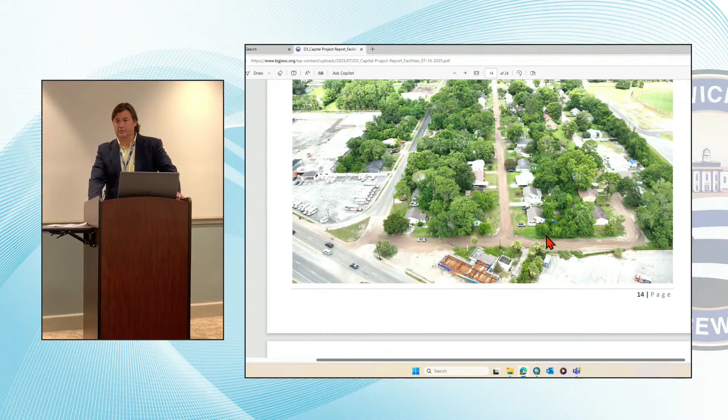They were putting base down last week when I went out there. I haven't been out there this week. Yeah, end of last week they were putting base down. They should be tightened up, but not complete that I'm aware of.

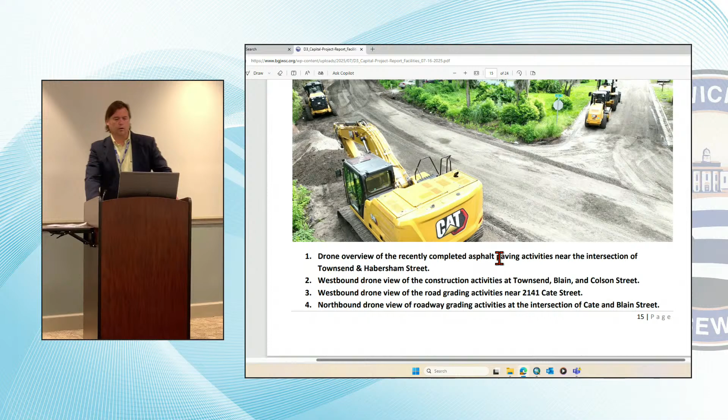Okay, Division 1, water production facility, exit 29. That's our 3-division project, the first being the water production facility, an improvement of the well site. That's what's going on right there - see a lot of dirt work happening. It's on the site of the treatment plant.

A little bit of stop and regroup once the water line was discovered out there in the way, and we had to work through that, along with a little issue with the power feed into the plant itself. Got that figured out - I believe we're beyond that hurdle.

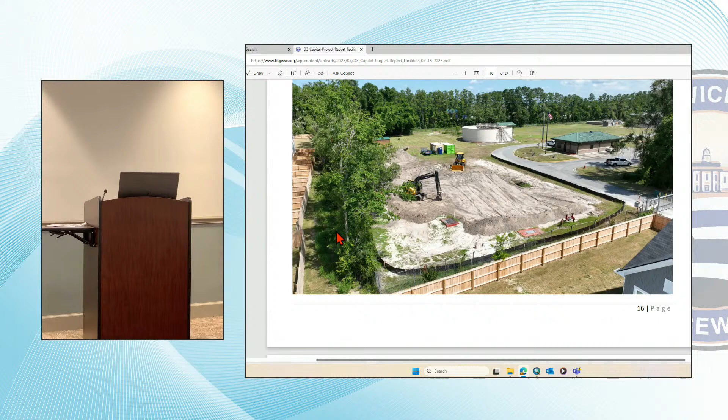Another good shot of the site right there. I was saying that looked like it was under construction - they're all done now. These are the townhomes in the back right here, and these are just the wooden fences. You can see the proximity to residential development next to our plant site, something we had to consider during design.

Getting some dirt in there, getting the site graded out, materials arriving. The contractor has plenty of room for lay down. Good stock of pipe, which you'll generally find at a water production facility - a lot of fittings and whatnot sit out there. Good thing for them, it's a good secure site.

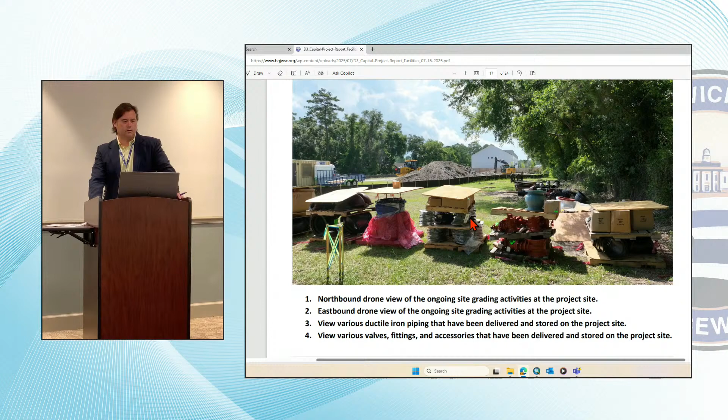How much fill did we put in there? Not a lot, maybe 12 to 16 inches or so. It's not much - the roadway was built up, elevated a little bit higher, so we just smoothed it out, because that side did hold water a little bit due to the way it's graded out there.

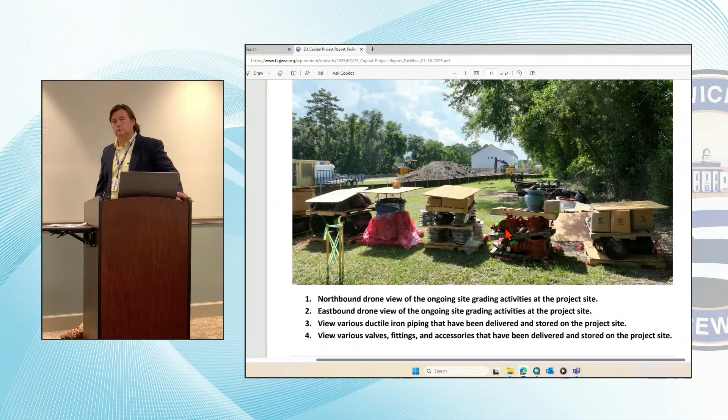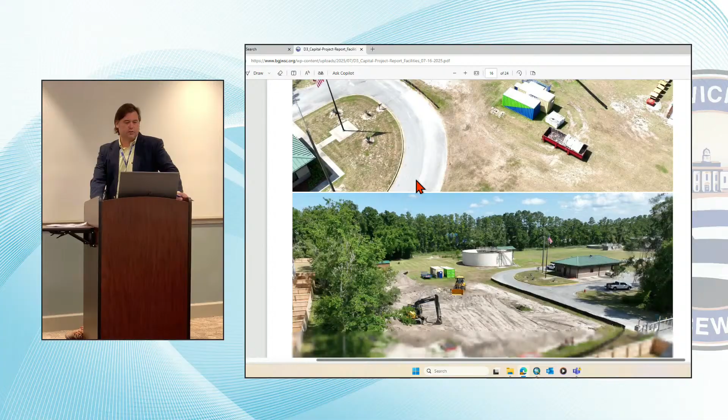I think we've got the county addressing some other drainage issues out there - you can't really see it in any of the pictures, our entrance road isn't shown. Glynn County owns the parcel of property that goes from Southport Parkway to our gate here at the plant. The plant site itself is on the water and sewer commission's parcel. That entrance road is still owned by the county board of commissioners.

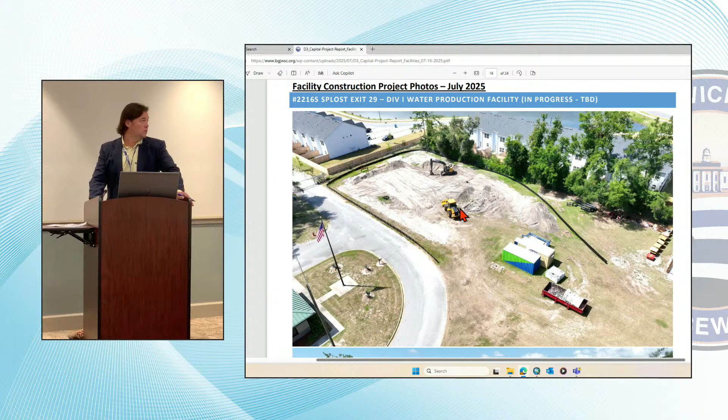The development next to it is shedding some water onto the dirt/gravel surface, so we're getting some washing out, and we're working with county staff - they're taking a look at that. I think there's some other issues on the other side that Glynn County staff is working with that development on, and we threw our issue in there with them to take a look at and talk to those folks too. Hopefully we'll be able to get something addressed - maybe just put a swale in or something to keep that water from running off across our road, or Glynn County's property.

Okay, exit 42, elevated storage tank, that's up there. If you panned a little bit to the north and looked across the interstate, you might see Buc-ee's. You can definitely see it while standing on the site, right there by the Conlon project.

They called me yesterday or today, and I talked to them this morning. Anyway, we always call it Project Bruin, but now they're apparently calling it something else. So anyway, we're going to continue calling it Project Bruin.

This is Project Bruin warehouse over here. This is our elevated tank site that we worked with Glynn County Development Authority to get.